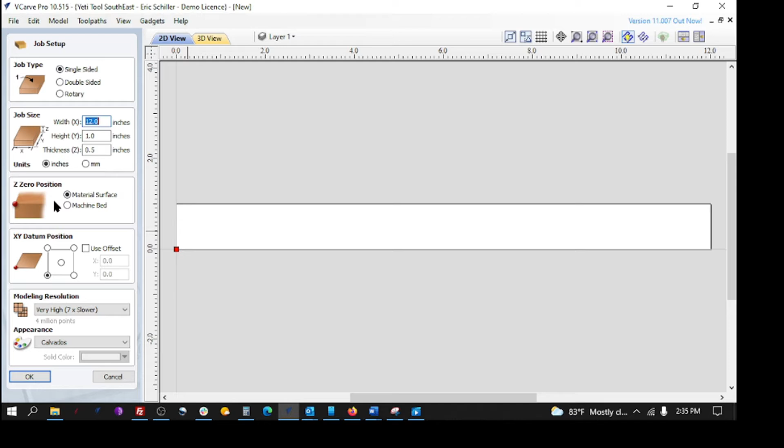I started VCarve. I did a 12-inch wide piece, roughly 1 inch tall, 1/2 inch thick. This is a simulation of what he gave me on a movie. We don't have to do any vectors because there's texturing built in. If we have vectors drawn in, we can apply textures to them, but we don't need to for what he's doing. I don't want to show his picture since I'm not sure it's okay with him, so I wanted to show him this video first.

So switch straight to the tool pathing, and we come to textures. Here in the textures, we can pick what tool we're going to use. In this case, I'm doing a 1/4 inch ball nose.

Start depth is going to be 0. We can play with this as we go. The maximum cut depth is going to be 0.15 or so, whatever depth you want. This was just what I had, and it actually looked very much like the sample he showed me in the little movie he sent.

Maximum cut length is going to determine how long we're going to go before it creates a vector, stops, picks up, and goes somewhere else. So 0.4. The overlap is going to be 30%, as much as 30% into a previous vector that it's cutting. And the step over is 1/8 inch roughly.

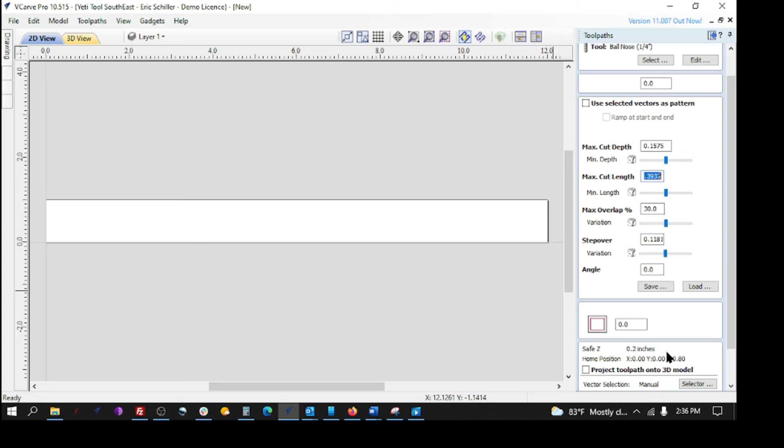Again, this is just what popped up when I did it. So we're going to do texture, and I'm just going to call it dimpling. Okay, dimpling. And then calculate it, and just let it do its magic.

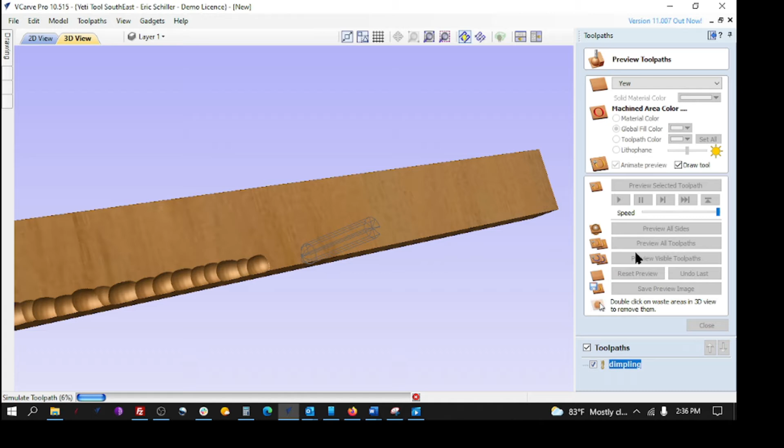Now, that doesn't look like much, but we don't care because it's doing the work on it. So we're going to reset the preview and then preview all. It's basically coming in and taking the 1/4 inch ball nose, overlapping up to 30%. Length of each individual segment line is up to 0.39, I think we had.

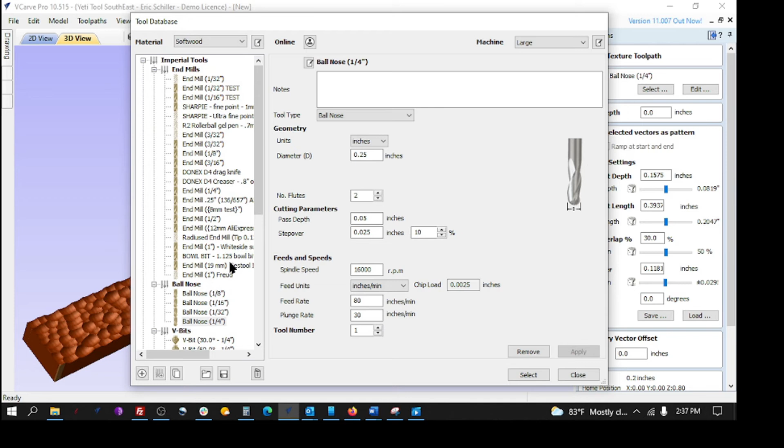And there it is if we look at that in 3D. That's basically the exact look he gave me. So we're going to come back into it—that's with a 1/4 inch tool. Let's change that to a smaller ball nose, an 1/8 inch, which is probably better set up for what he had.

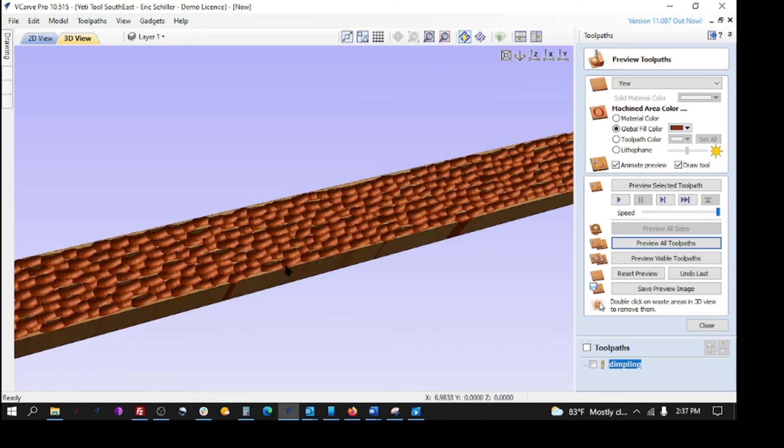We're going to reset the preview, let it regenerate, and preview all. And there we are. Now I may come back in if we see some of these areas where we're not cutting all the material. We're not, because we started at 0, and like this area right here, we've got some areas that are going to leave a very thin skin, and we don't want to do that.

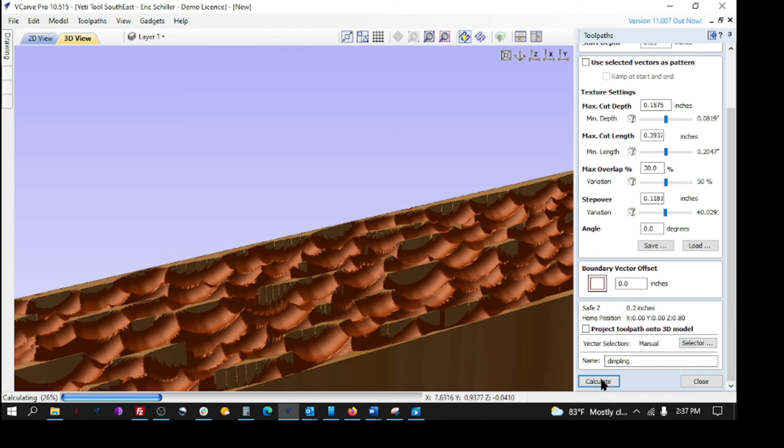So what I'm going to do is go back into it and not start at the material top. I'm going to say I want to go down 50 thousandths. I can either add that here or not—we'll just see what that does. So we'll reset the preview and look at that exact same area. But now we're definitely dropping down into the material.

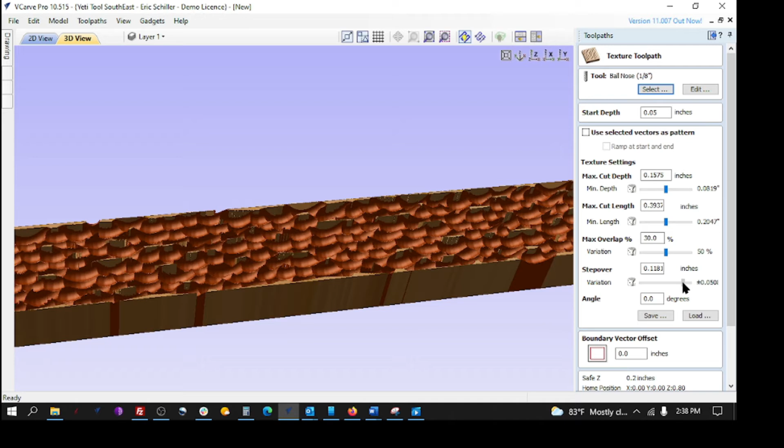And playing with the dimpling, there's some areas here that I want to do a bigger overlap. So the step over, I'm going to raise the step over a bit. Recalculate, reset the preview, preview all.

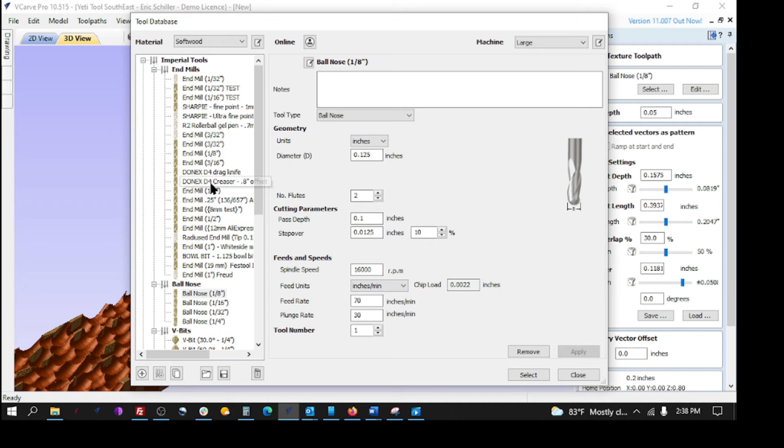And that may or may not be the look that we're wanting. It's probably too small, so let's go back with the bigger tool—back with the 1/4 inch. This now has more of a step over, so there'll be more.

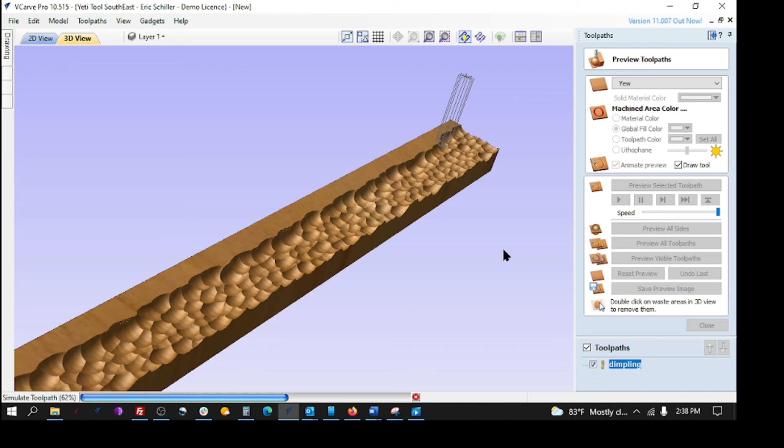There we go. I think that's more the look that he had—a little more random with everything dimpled down, no strings sticking up to the top of the surface. I think that's more the look of what he had in mind when he sent me his drawing.

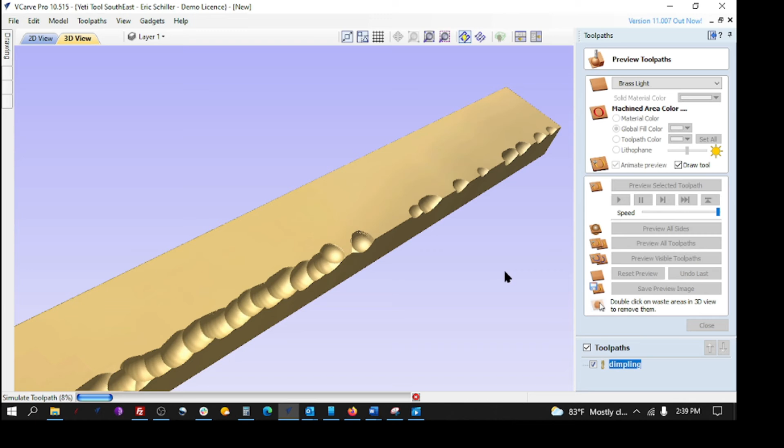Change that to brass, reset, preview all. And that may be more of an overlap than he wants, but again, it's all definable very quickly.

So there we are. There's your setup. Want to save it to the machine? We just go to Save.

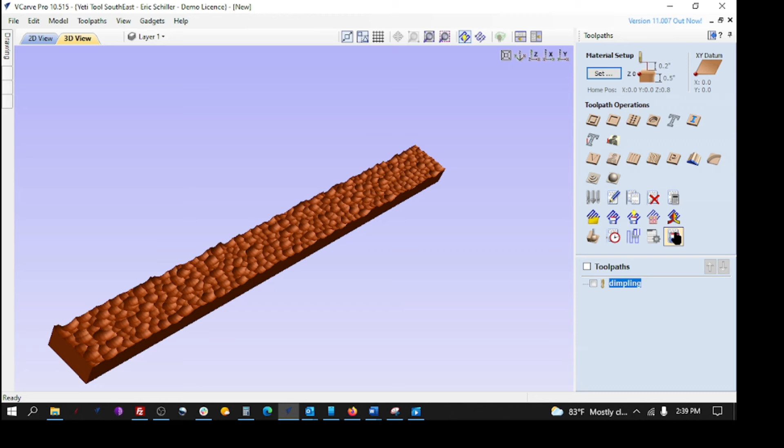Pick which toolpath we want to do, send it to the SmartBench, save it. I'm just going to save this to a Vectric job—I'll save it to my showroom and call it dimpling G-code. It's saved, it's ready to go to the machine.

Now we have Smart Transfer, which is an app we created from Yeti Tool that lets me just drag that folder or that individual G code file into Smart Transfer, and it'll send it. Or we could do it with FileZilla—some of the older customers use that.

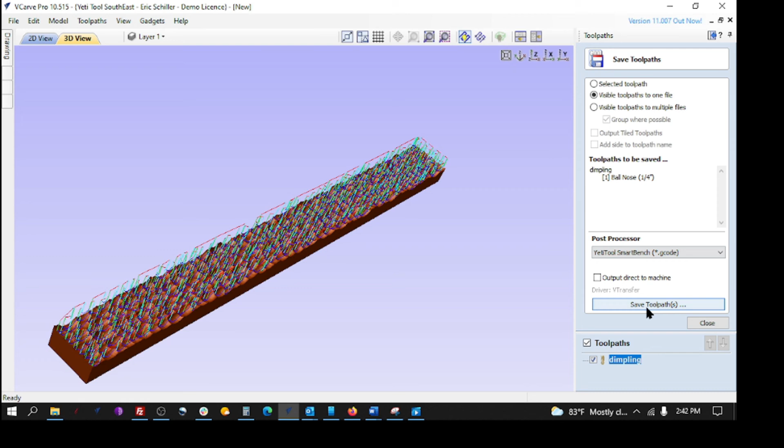Some of our other older customers use FileZilla, so we would just take the same thing, save it. I'm going to save it under 430 Industrial Lane, dimpling, save. I've already saved it, so I'm going to replace it. And then I would open FileZilla, and there it is.

I always hit the right button to refresh, and just take it and drag it over, and it's at the machine before I can get up out of the desk. It's there, ready to run.

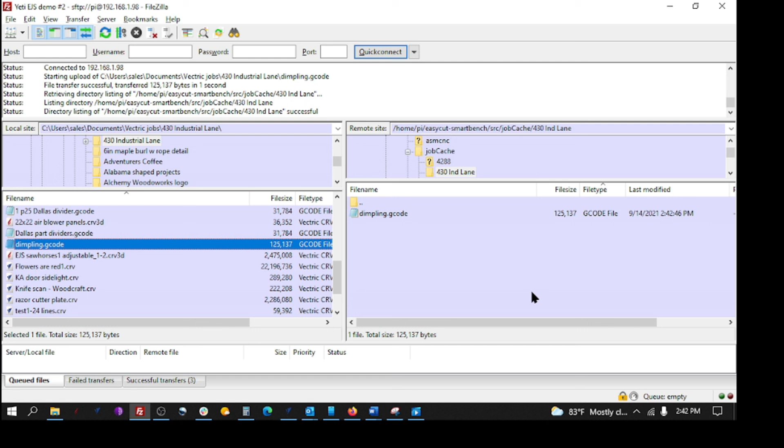So, yeah, there's dimpling, and that can be done on brass, aluminum, plexiglass, any other material that you can cut with a router—we can do it with this. So that's a great question. Very simple to do, and you can create all kinds of different patterns very easily, either by creating the vectors or just letting it randomize the output. Very quick, and that's the power of VCarve.